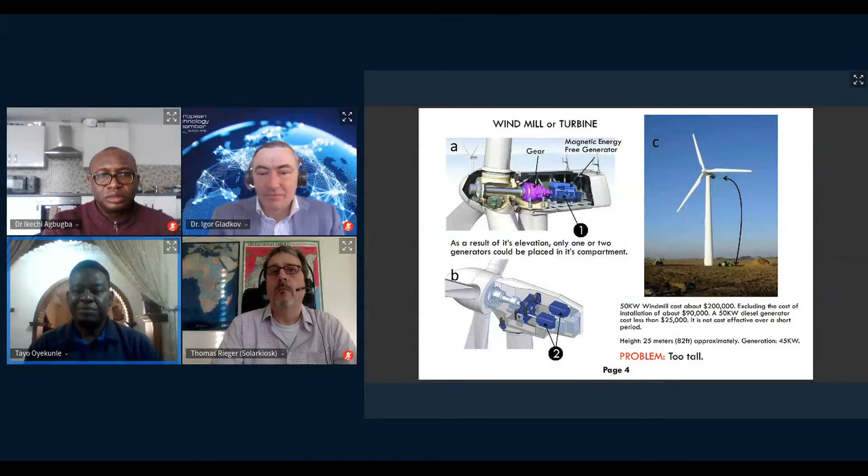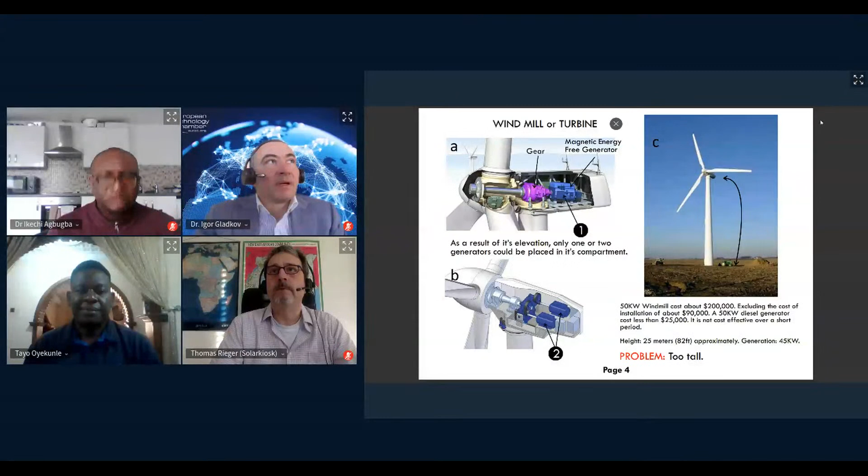The windmill needs an elevation of 82 feet to properly engage with the wind. A 100 kVA generator weighs about 2 tons. It is difficult to suspend more than 1 or 2 generators at an elevation of 82 feet with just one tower. As a result of its elevation, only 1 or 2 generators could be placed in its compartment, thereby limiting the potential at which the windmill could generate by about 400% or more. This means that the windmill has the potential to generate about 400% more of what it is currently generating. Height is the problem of the windmill.

Another issue is the cost implications. A 50 kilowatt windmill costs about $200,000. This excludes the cost of installation, which is about $90,000. A 50 kilowatt diesel generator costs less than $25,000. So the windmill is not cost effective over a short period of time.

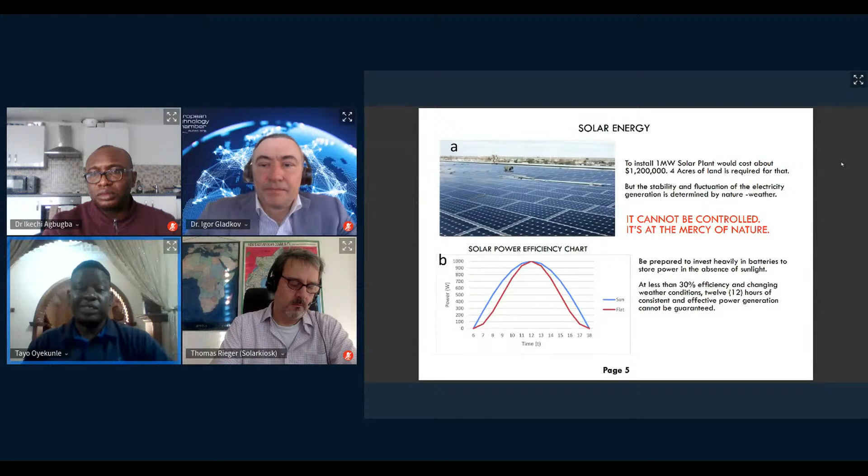But the stability and fluctuation of the electricity generation is determined by nature. Take a look at image B. The graph plots the rate at which the sun shines and the level at which solar is generated. 12 hours of the day from 6 a.m. to 6 p.m., power is generated at an unstable capacity. You can expect the sun to shine today, but Mother Nature would decide otherwise. At less than 30% efficiency and changing weather conditions, 12 hours of consistent and effective power generation cannot be guaranteed.

Solar power generation cannot be controlled, thereby cannot generate at maximum capacity. It's at the mercy of nature. Nature determines what goes around with solar energy. So to achieve stability with solar energy, you need to invest heavily in batteries, but the cost of standard grade batteries are not smiling, as we all know.

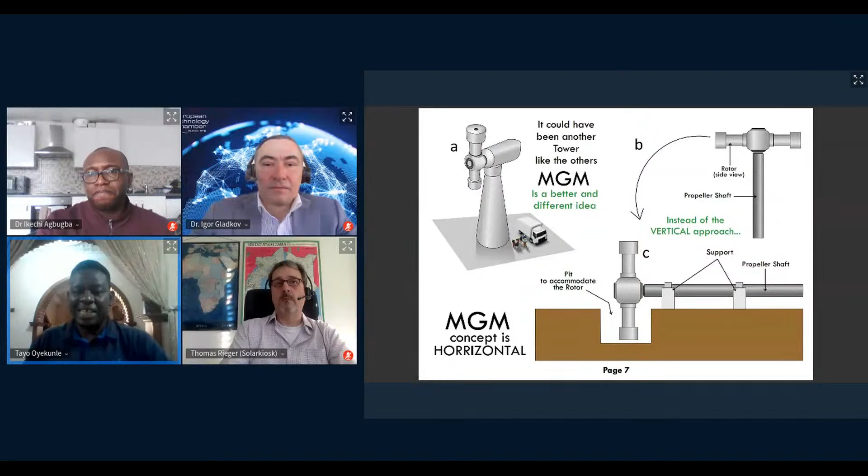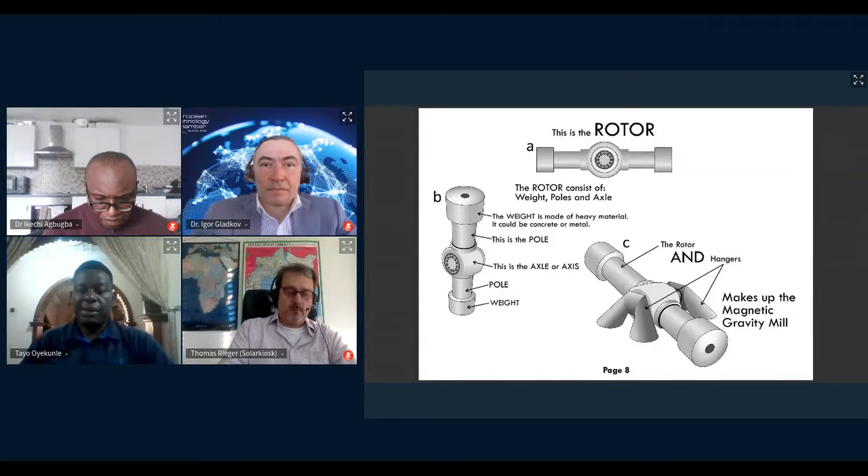Let's look into what makes up the MGM. Briefly take a look at image A. This could be everybody's thinking, that it could have been another tower just like the others, but the MGM is a better and different idea. Take a look at image B. You can see the rotor and the propeller shaft, but instead of the vertical approach, the MGM concept is horizontal. Take a look at image C. You can see the pit being dug in the ground to accommodate the arms of the rotor, and the support that helps lay the propeller shaft horizontally.

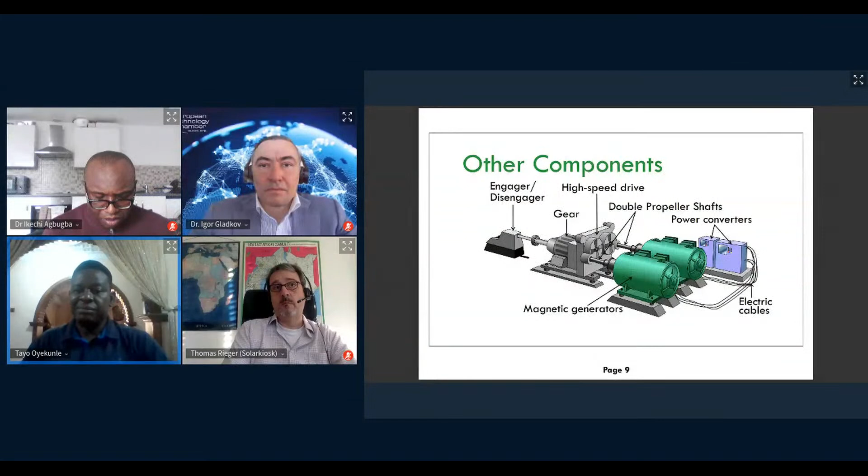Image A is the rotor. It consists of the weight, poles, and axle. Image B is the top side view of the rotor. You can see the description of the weight, poles, and axle. The axle and the axis is the middle section, and it consists of a powerful bearing. Image C shows the entire rotor and two hangers, which together make up the magnetic gravity mill.

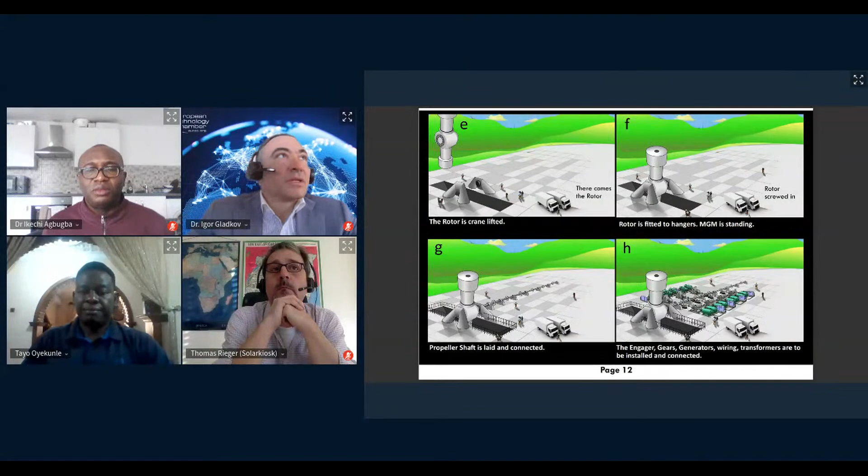Now image E, there comes the rotor being lifted into position, supposedly with a crane. Image F, the rotor is fitted to the hangers. The MGM is in position.

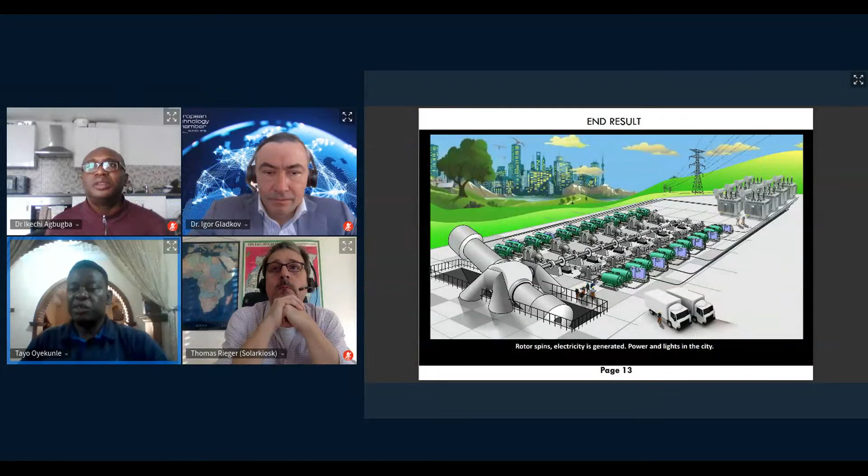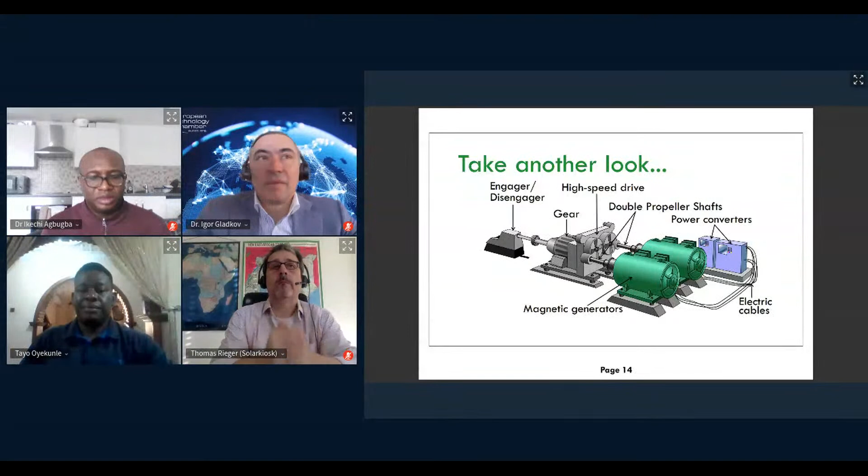This is the end result of the MGM power generating plant. There you can see the magnetic gravity mill and other components in position. You can see the transmission, the transformers, and transmission of power to the city. Enjoy the beauty of this picture for a while.

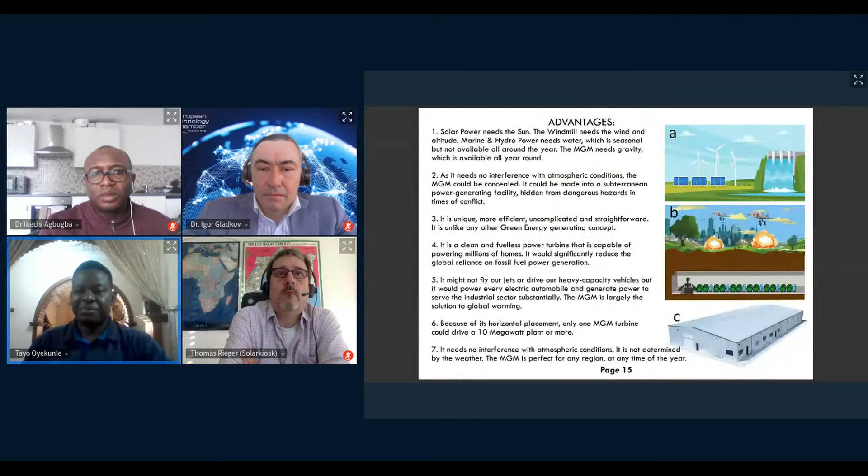Number four, it is clean and fuelless. It is a clean and fuelless power turbine that is capable of powering millions of homes. It will significantly reduce the global reliance on fossil fuel power generation.

Number five, it might not fly our jets or drive our heavy capacity vehicles, but it will power every electric automobile and generate power to serve the industrial sector substantially. The MGM is largely the solution to global warming. Number six, because of its horizontal placement, only one MGM turbine could drive a 10 megawatt plant or more.

Number seven, it needs no interference with atmospheric conditions. It is not determined by the weather. The MGM is perfect for any region at any time of the year.

Our objectives. Number one, finding solutions to global warming. Number two, enhancing clean, green energy, thereby reducing the carbon emission problem.

Number three, reducing global reliance on fossil fuel for power generation. Number four, more affordable power solutions. Number five, renewable energy that is clean and independent of regular natural restrictions.

Number six, like it was said, it cannot fly our jets or fuel machineries that need combustion. The MGM is not created to eradicate the need for fossil fuel. No, it's not created to eradicate the need for fossil fuel. It is created to help the world achieve a climate balance. That's our main goal, to help the world achieve a climate balance.

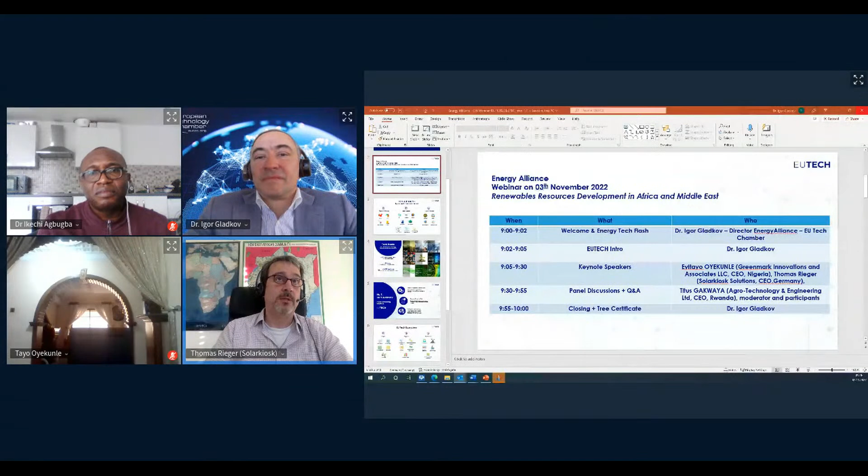Now I would like to invite Mr. Thomas Rieger. Thomas, I give you presenter rights. Do you have my presentation, Igor? Can you pull it up? Last time I tried to present but it didn't work. Let me see, I sent it to you this week. You can start with the introduction and I will check. Okay perfect, super, I will just. Fantastic, just check your email, it should have been there in the last 2 or 3 days.

So my name is Thomas, I'm the CEO of Solar Kiosk. Solar Kiosk has started to work predominantly in rural villages in Africa, and our main goal is to bring access to electricity into off-grid locations, into villages, into what we used to call the BOP, the bottom of the pyramid communities.

At the end of 2019, we had over 280 projects across 6 countries in Africa. As this has been a very long time we've been working in the field, today's topic is renewable resources in Africa. I did a little historical outlook on renewable energies in Africa, why and how they can help, alongside our history. Let's dive right into it.

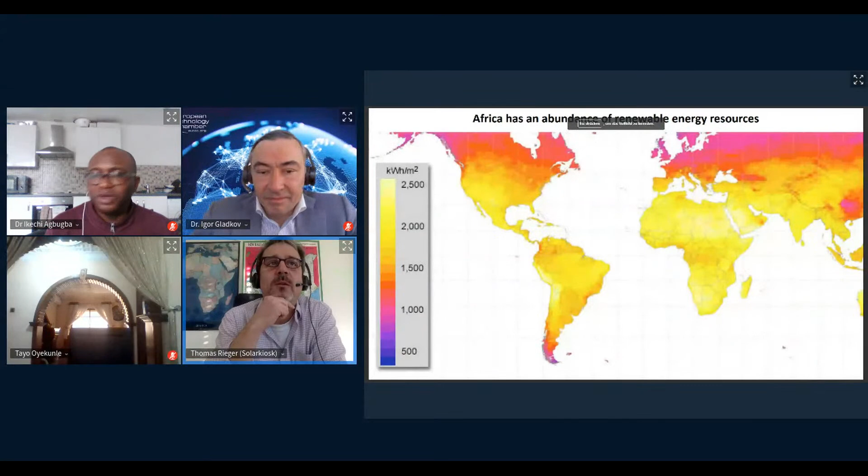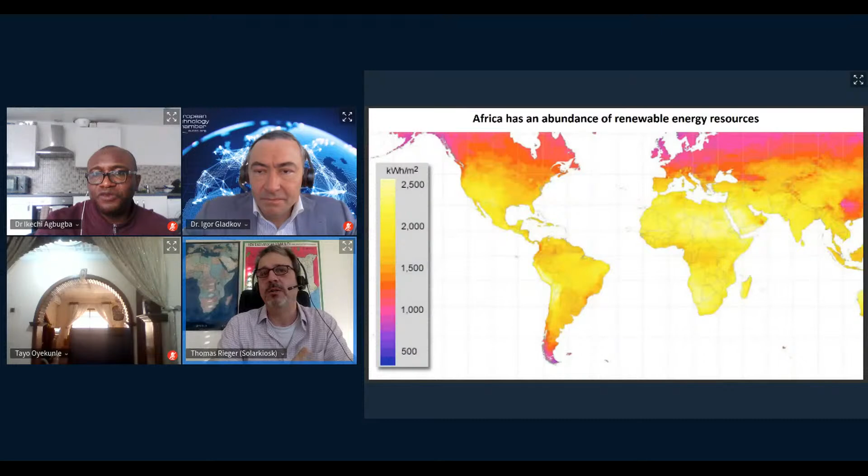We can look at the resources itself. I will focus a little bit on solar energy because that's the field we're working in. There is a discrepancy in the energy mix in Africa when you look at the fact that Africa has the richest concentration of natural resources. For example, 30% of all earth mineral resources are found on the African continent, but that goes also for renewable energy resources. Here is the example of the irradiation map worldwide, and we can see that Africa has the richest irradiation resources, which just cries out for solar as one of the technologies to be installed there.

So there's a tremendous potential for the development of renewable energies in Africa. Igor, you can go to the next slide. Despite that fact, we can see that Africa is still in the dark today.

When we started in this field back in 2011, 1.3 billion people in the world lived without access to electricity. Much has been done by companies like us and others also presented here, and today we're looking at still 770 million people. SDG 7 says that by 2030 everybody should have access to energy, especially from renewable sources.

If we focus on where those people without access to electricity are living, we can see that of the 770 million, 572 million are in Africa. A lot of work has been done, but the COVID-19 crisis put a deep stop into the developments. The low energy purchase power of households not connected to the grid went further down through the COVID crisis, and the curve that had been nicely developing had an interruption, so we need to catch up again.